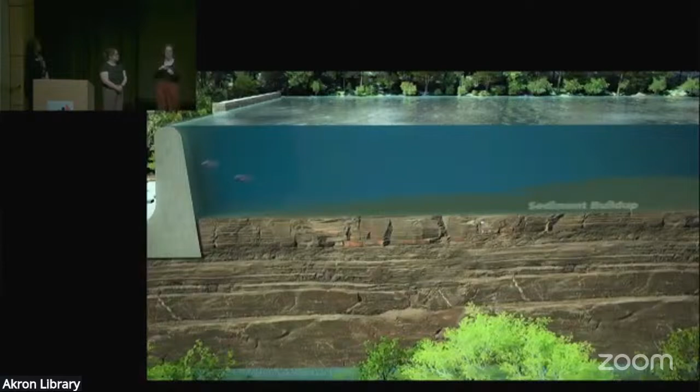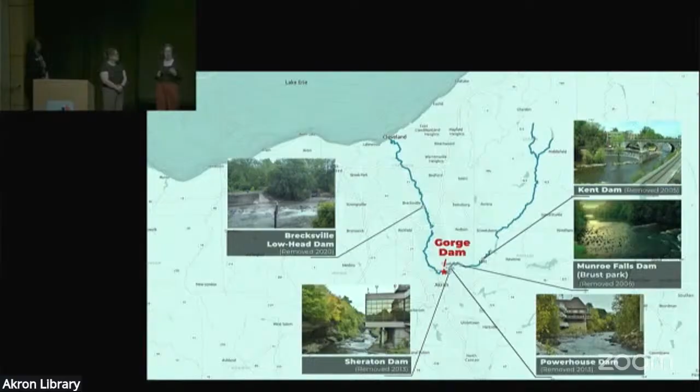Even though dams were built with good intentions, they cause a lot of problems for water quality. In addition to preventing fish from traveling freely, dams affect the dissolved oxygen, flow, and temperature of the river. They also reduce habitat, trap and concentrate sediments and toxins, and alter the food web of the dam pool. Five other dams have already been removed on the Cuyahoga, resulting in nearly 10 miles of restored river.

And what's good for the fish is also good for the people. These projects helped improve quality of life and drive economic development along the riverfronts in these communities over the past 10 years. That's why a large group of community partners have joined forces to free the falls at Gorge Metro Park.

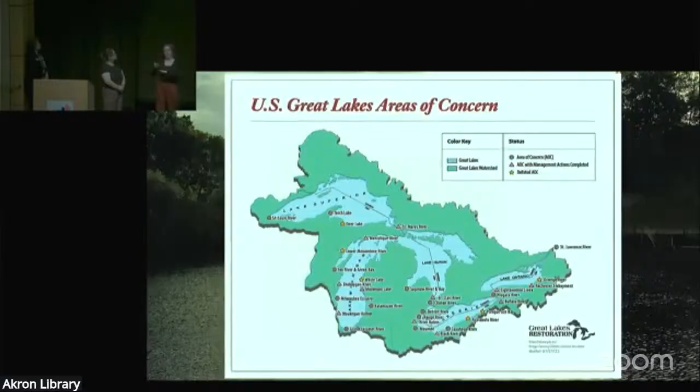US EPA intends to fund the majority of the project through the Great Lakes Restoration Initiative, and non-federal funds will also be required. A funding plan for sediment remediation, construction of the sediment disposal site, dam removal, and restoration of the dam pool is in progress.

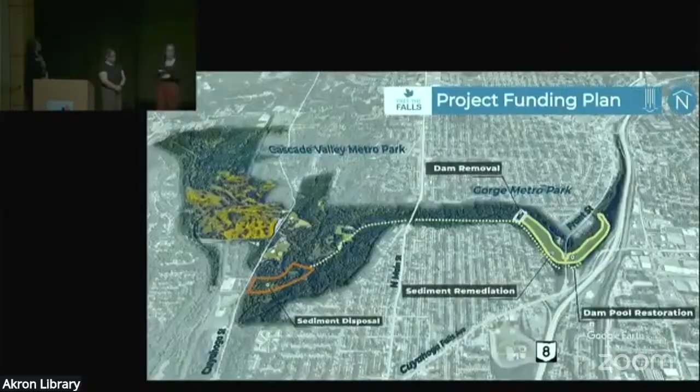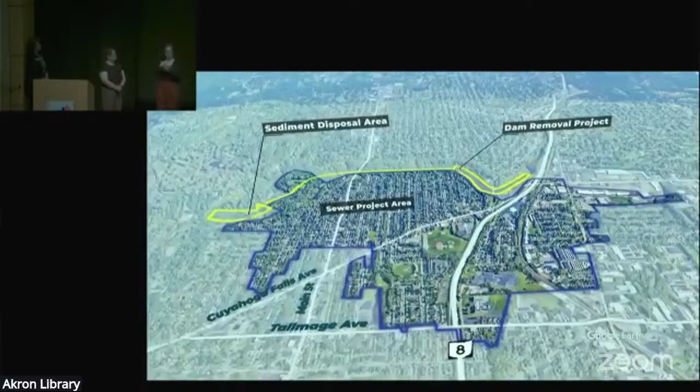Meanwhile, the City of Akron's ongoing sewer system upgrade requires construction work in the same area. While both projects are being carefully planned and coordinated to minimize disruptions to the public, there will be park and trail closures over the next several years. Although the result will be worth it, taking down a dam this big isn't easy.

So how will we do it? First, nearly 1 million cubic yards of sediment must be removed from behind the dam.

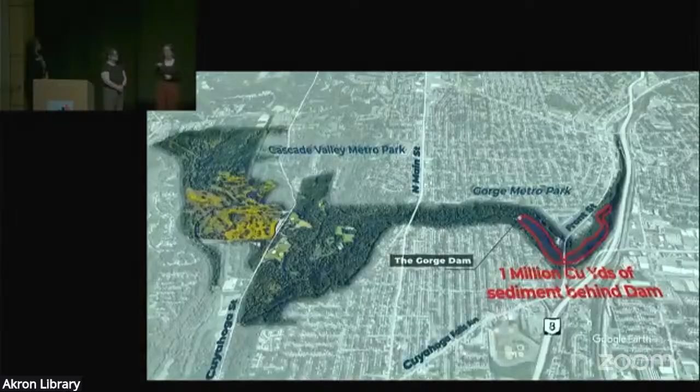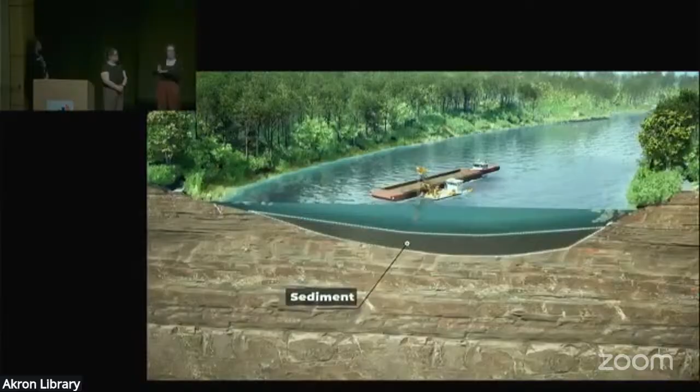The sediment has been collecting for 100 years and contains pollutants consistent with the area's industrial past. A mechanical dredge system consisting of a clamshell bucket, crane, and scow barge will troll the reservoir, slowly removing sediment scoop by scoop. This work will likely be completed over 2 construction seasons.

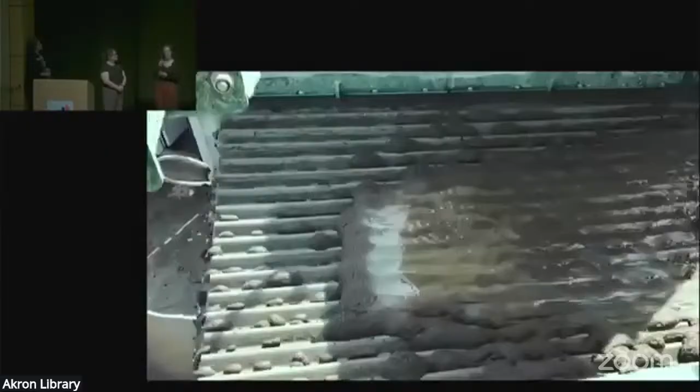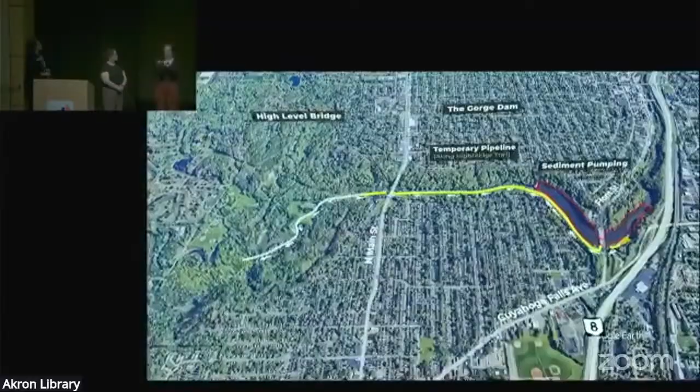Each full scow barge will then be unloaded at a staging area where it will be screened to remove any large debris. The still wet sediment will then be pumped through a temporary pipeline under the Front Street Bridge and then alongside Highbridge Trail. It will continue under the high-level bridge at North Main Street to the Chuckery area of Cascade Valley Metro Park, about 2 miles from the dam.

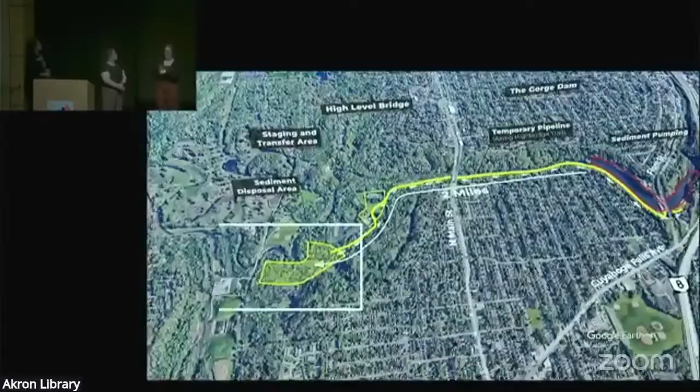The Chuckery area was historically a dumping site and will be utilized as the permanent disposal area for the contaminated sediment. To make room to store the sediment and concrete mixture, trees must be removed from a portion of the Chuckery area. The sediment is mixed with concrete in the pipeline to form a more solid material that can be contoured before it is fully stabilized.

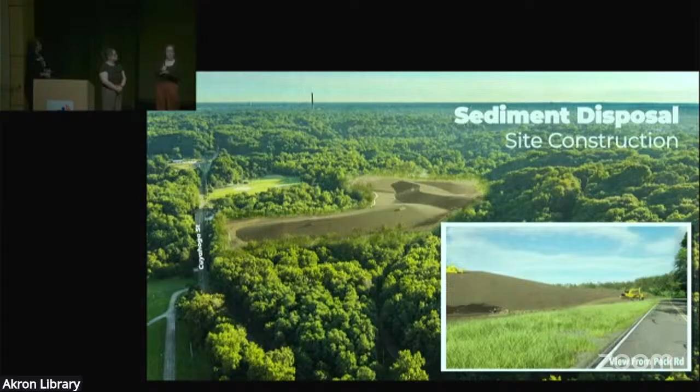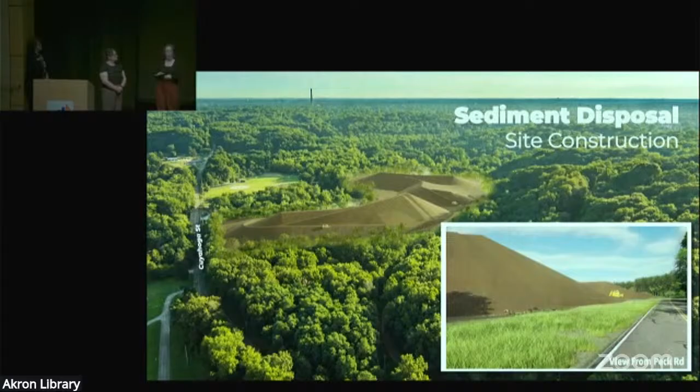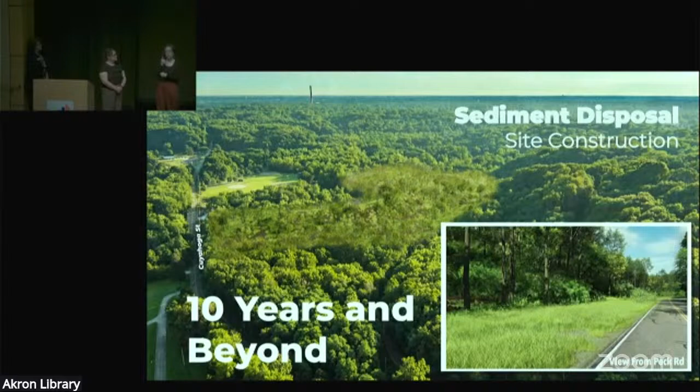This is an innovative and safe approach that has been used at sites across the country. The disposal area is designed to ensure permanent stabilization of the sediment mounds, minimize impacts to buried utilities, and appropriately manage stormwater. After final grading is complete, the sediment mounds will be capped with soil and the area will be planted with a native mix of trees and vegetation, and contoured to look as natural as possible. Within about 10 years, the final conditions will result in a biodiverse habitat that will complement the natural beauty of Cascade Valley Metro Park.

Next, the dam itself will be removed. The water level of the reservoir will slowly drop as the dam is dismantled. The dam will be deconstructed using a barge-mounted excavator.

To lessen the impacts to the area and to reduce costs, it may be possible to remove only the center spillway and exposed piping of the dam. If left intact, the remaining sections of the dam could then serve as a cultural resource and potentially be repurposed as a river overlook for park visitors.

The final step of this project will be to restore the river corridor to its natural state, with a rocky channel and vegetation that will promote a healthy river ecosystem.

Restoring the original grandeur of the gorge is our region's path to a vibrant future for the health of the river, its watershed, and its people. That future will bring clean water, natural beauty, recreational opportunities, educational experiences, and economic development.

This project has national significance and is supported by more than 50 agencies, businesses, and civic organizations, as well as the public. Dam removal is critical to restoring the Cuyahoga River and completing a recovery decades in the making. From our industrial roots flows a new future, one that carries Summit County forward while honoring our rich history. The result will be a healthy, free-flowing Cuyahoga River for all to enjoy.

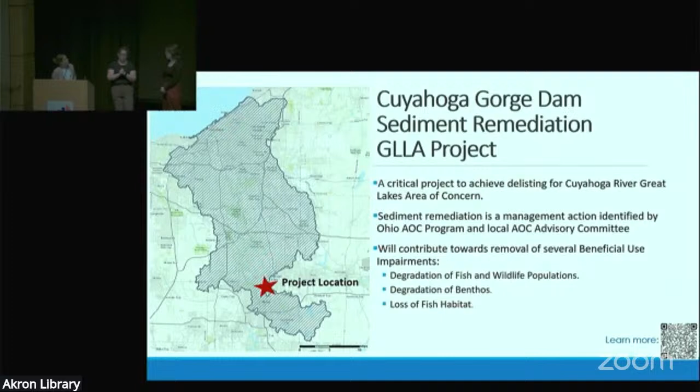I want to highlight that the levels of contaminants within the material are low-level, but they still do have health implications and are toxic to fish and wildlife, and therefore humans as well, so they need to be handled and placed properly.

But they're not hazardous material. If it were hazardous material, it would be a longer process, there are different programs, and it could end up costing more and taking more time. So it's really great that we're not dealing with hazardous material.

The dam pool itself goes up 1.5 miles upstream of the dam. This is the area that's going to be dredged, where the sediment is going to be removed. The sediment thickness throughout this dam pool varies anywhere between 1 to 34 feet. So it's not the water depth, it's the actual amount of sediment within the area that needs to be removed. That ends up being a lot of sediment, up to approximately 865,000 cubic yards.

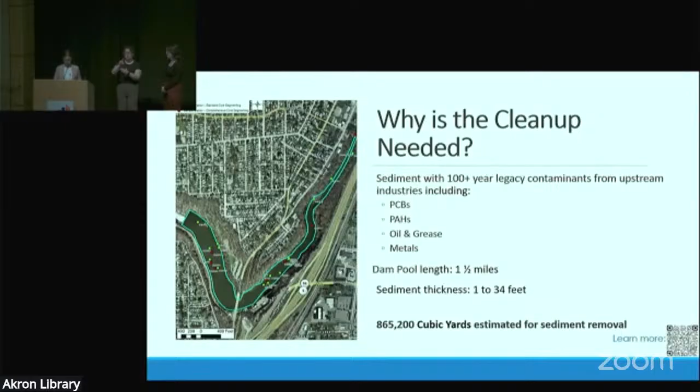That much sediment comes with a price tag. The Great Lakes Legacy Act Remedial Action Project costs just greater than $130 million. This effort, this project, is under a Great Lakes Legacy Act project, and in order for it to be a Great Lakes Legacy Act project, it has to be within an area of concern. That's one of the pre-qualifications, or criteria, for it.

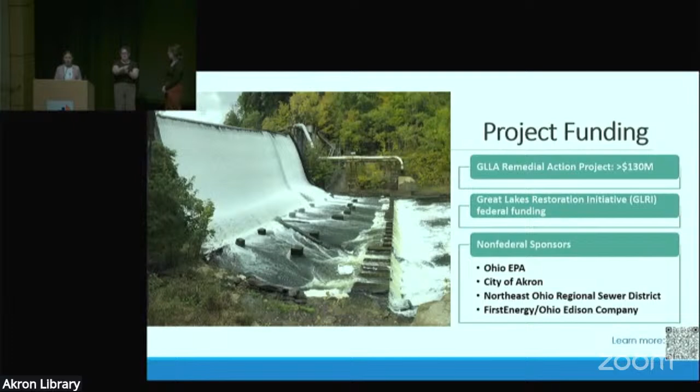With that, every Great Lakes Legacy Act project has a project agreement. This is with the United States Environmental Protection Agency's Great Lakes National Program Office, as well as non-federal sponsors. The funding from the federal portion of the project comes from the Great Lakes Restoration Initiative, and then the partners listed there—the Ohio EPA, City of Akron, Northeast Ohio Regional Sewer District, and FirstEnergy/Ohio Edison Company—are all non-federal sponsors to this project. They have signed the project agreement and are committed to either providing cash or technical support or in-kind contributions.

So I just want to highlight here project partnerships and what this project is. What's great about the Great Lakes Legacy Act program is that it is a partnership program, or non-regulatory—we're working with the partners to get these projects done. I had already mentioned the project agreement is between EPA and the non-federal sponsors, but there are several other project partners also listed there, and they have provided support, whether it be cash contributions or technical contributions for the project itself. So definitely want to mention there's support from the local partners to make sure this project can move forward and get done.

And also with any area of concern, there's a lot of federal partnering agencies that we work closely with, and the United States Army Corps of Engineers will be working to support the construction part of the project.

I'm not going to spend too much time on project timeline because when I introduce the next speaker, he's going to spend more time going through the details, but I did want to provide a brief overview, a background of where we've been. I had mentioned before, the Ohio EPA selected the dam removal as a project to address the beneficial use impairments within the area of concern. There was sampling completed in 2009 and 2011. A feasibility study related to the dam removal occurred in 2015.

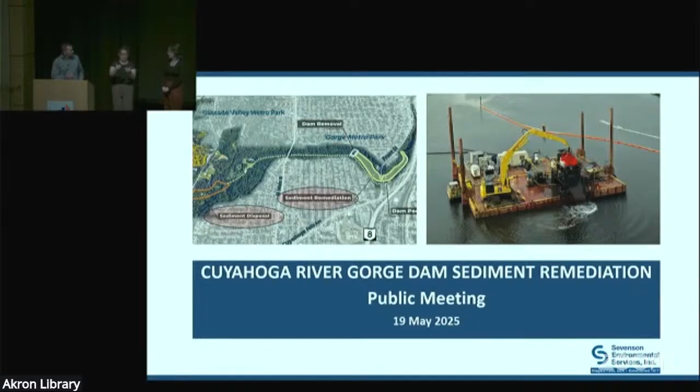A little bit about Sevenson: we are a more than 100-year-old company from Niagara Falls, New York. We are a family-owned business, owned and operated. It's the fourth generation now leading the company. We started as a building contractor in 1917.

One of our cool projects that we like to point out, in 1969, we stopped the flow of the falls. It's about 10 minutes from our headquarters, so it was a geological study that the Army Corps of Engineers actually did. There's another falls to the right of that one where we directed the flow, and they studied the rocks there that were building up at the bottom.

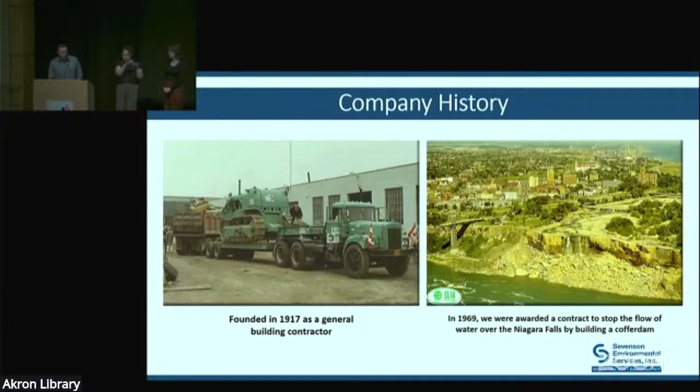About 10 years after that, and again pretty close to our headquarters, Sevenson performed work at the first Superfund site. That was called Love Canal. I'm sure some of you have heard of it. That created the Superfund program, which kind of sounds like its name - it was a big fund to clean up contaminated sites around the country. We performed the work at the first one. It was an old chemical dumping site where they were dumping chemicals near homes and by a school, actually. The contaminants were leaching into the ground and into the water, so we were called in to clean that up and cap the area eventually. So that formed the Superfund program.

That's another project we like to call out, and that kind of really got us into the environmental work. Since then we've been a national leader in environmental cleanup.

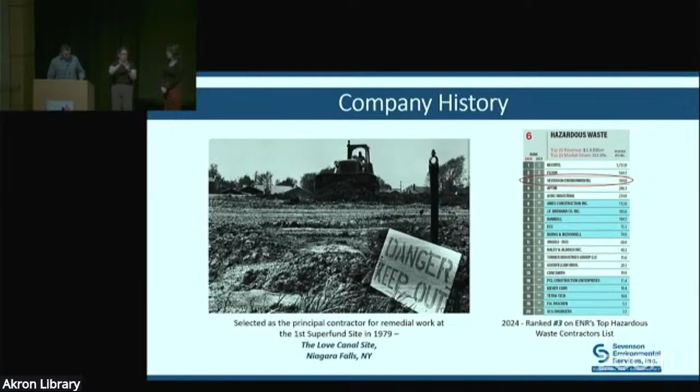A little bit about us, a couple more facts here: we completed over 1,500 remediation projects, 151 Superfund sites. Our revenue is about 60% private, 40% public. This is a publicly funded project - EPA, Army Corps, those kind of entities that we work for, along with private revenue.

We've got about 600 employees. That varies throughout the year as construction season in the summer, and a lot of them are union employees. We have a lot of union agreements around the country, so they're the ones operating the equipment, moving the dirt, shoveling, stuff like that. We did want to point out we are using union employees on this project, employing local union workers, whether they're running the equipment or on the ground as laborers. We'll probably have 20 to 30, maybe even a little more, local union help. So we're excited to get them involved in the project as well.

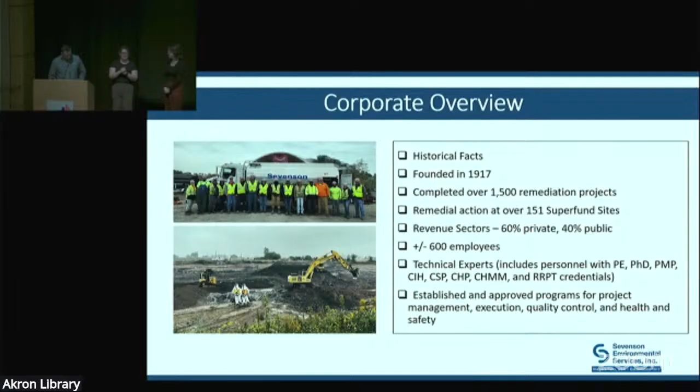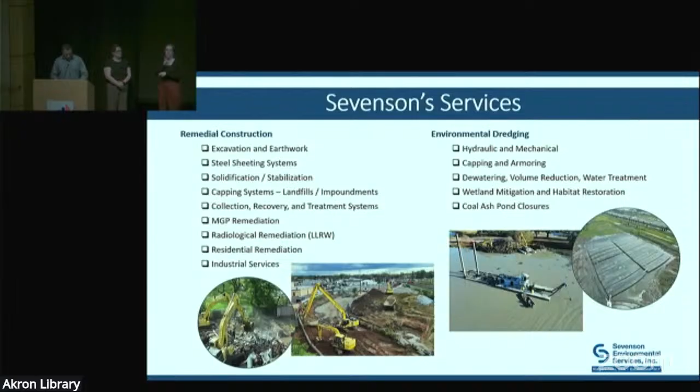A little bit about our services - it's kind of split there on the left and the right. Remedial construction is kind of like uplands work, dirt work, moving dirt, excavation, residential remediation, stuff like that. On the right-hand side is environmental dredging. Really the last 20 years or so, a lot of the contaminant cleanup has shifted to marine work, so that's a big part of our business now, but we really grew with the land work and then transitioned into the marine dredging, which, as you all know by now, this is a dredging project. So those are some of our services.

Equipment, we own a ton of it. It's 3 to 4 hours away in Niagara Falls, so we're going to bring in a lot of it to perform this work. If things change in the field, and they will, we have a ton of resources close by, so we'll be able to mobilize equipment and get it here quickly to adapt to any challenges that arise. We also have the ability to custom make any equipment or material we need, and we're in the process of doing that for this complex project.

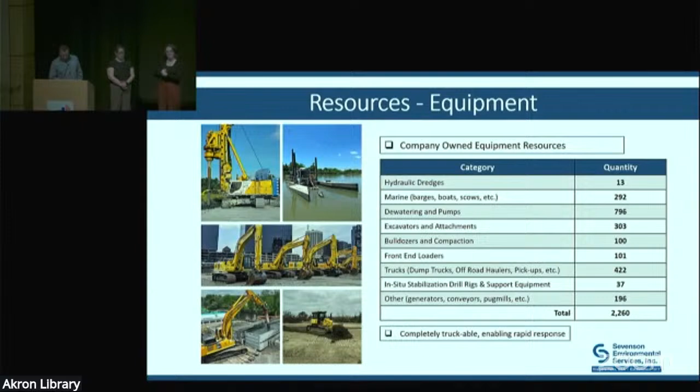Lastly on Sevenson is our safety program. This is the number one concern on all Sevenson projects: the health and safety of our employees, and also the community and the environment. So we take our safety very seriously.

We have certain health and safety plans that need to be formalized and submitted to the EPA, and they review it. So we review it with our field personnel and management - it's something we do on a daily basis. We have a morning safety meeting at 7 a.m. every morning. Again, something we take pride in, and we'll make sure this is a good, safe project as well.

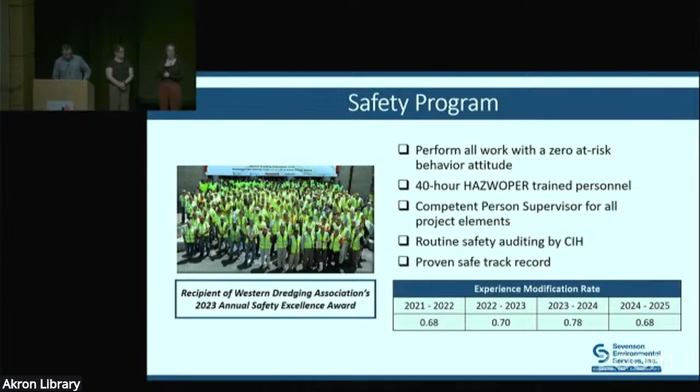Okay, so now what everyone's here for, a little bit about the work. I'm going to run through site prep, mobilization, and then into the dredging, processing, pumping, and restoration, and then at the end we'll touch on schedule.

With anything in construction, we like to remain flexible and just say that things will change, and we'll do our best to keep everyone informed. I know it's an important project, but construction has a way of changing daily, if not hourly. So I just like to state that going into it.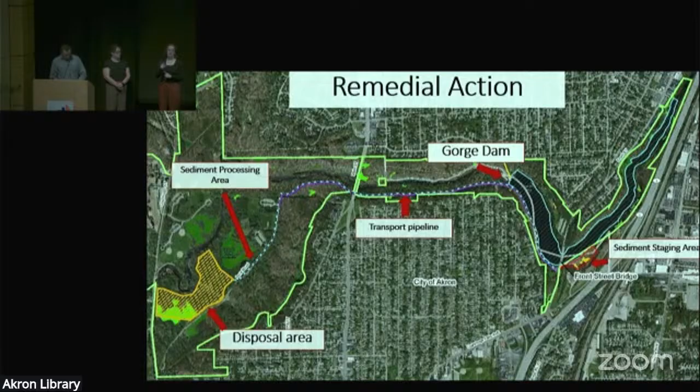Okay, so this is one of our staging areas up by the dredging. It's just off of Front Street at the former Ohio Edison property. You can see we have an access road to get in - we already brought in some stone today, so this is ongoing. We'll set up our staging area here, with a little trailer for some of our personnel, sanitation facilities, and a generator for power.

And then over here is the debris offloading area. We're expecting a bunch of debris as we dredge, and that gets separated out from the actual sediment. So it gets pushed over here, unloaded with an excavator, and then this is the debris staging area before it gets sent off site.

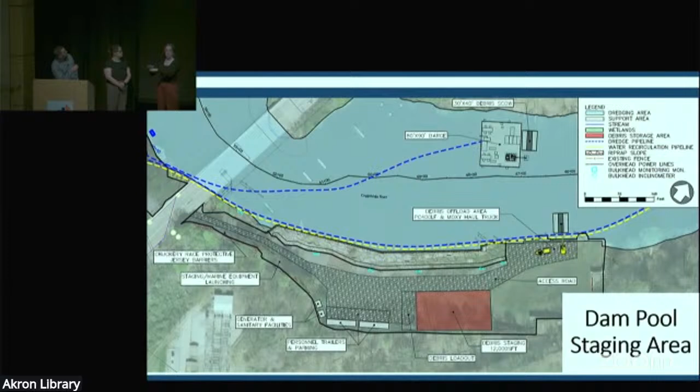We will have to access the other side of Front Street because the bridge only has about 12 feet of clearance, and our equipment would not fit under there. So we have to improve this area a little bit by building a ramp down to the water. If anyone's been over there, it's a pretty steep drop down to the dam pool, so we'll improve that a little bit to make sure we can get our equipment down there, but there shouldn't be a whole lot of other activity over at this smaller parking area.

We will put up a fence to secure the area, but some of the project partners who may need emergency access, whether it's FirstEnergy or Summit Metro, we'll be able to provide that. We've been working with them to make sure they have access to that.

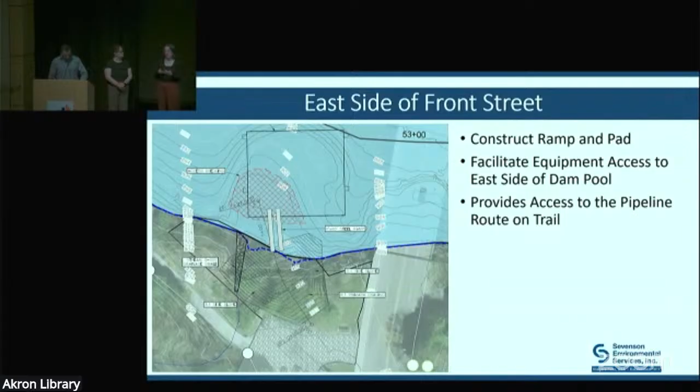Okay, and then it gets pumped down through High Bridge Trail down to our other staging area along Peck Road. This is obviously close to the tunnel project down there, so it'll be a busy area, but again, we'll have some trailers up here with some parking.

The darker blue areas are just equipment and material staging. This light blue area is a little water tank, holding tank to help with dredging. As you dredge, you're going to generate a little bit of water, so that's a little holding tank there to help us. And then there's a stone road we're going to build to help get equipment and personnel in between the areas.

I'm going to touch on this area a little later. This is where we're going to introduce the Portland cement to help stabilize the material. And all of that comes out of here, which is where the dredge material gets initially pumped to. If you can see this dotted line here, that is the dredge pipeline. So that comes down through the trail and then into this area where it gets staged until it gets processed with cement. Last thing to point out on this one, there is either a type 3 or category 3 wetland in this area, and that gets protected throughout the project, so we're staying off of that intentionally.

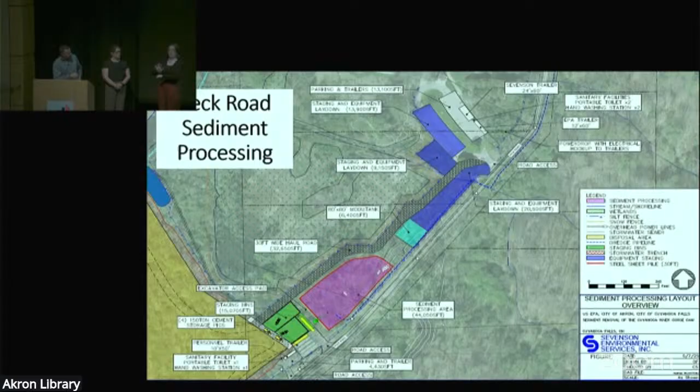There is a lot of mob and a lot of setup. We're probably anticipating 3 to 4 to 5 months. So like I said, there's a couple different areas and a lot of setup. So that's what we're expecting.

So a process flow diagram, and again, I'll get into each of these on their own in a couple slides here, but a dredge crew up here, we talked about how it flows down to the sediment processing area, and then this offshoot here is just the debris that we also talked about, where it gets separated and staged at the Front Street staging area.

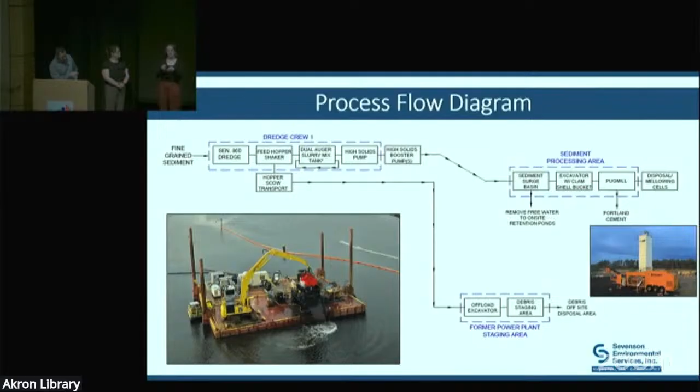Okay, a little bit about the dredging. Just wanted to show some pre-dredge surveys and then what we're anticipating for post-dredge based on the design of the sediment removal. So some of you may be familiar with this, but there are some deeper areas closer to the dam, and as you work your way toward Front Street, they're about 12 to 25 feet, I think, in just water depth. And then as you get on the other side, the east side of Front Street Bridge, it gets very shallow. So just wanted to point that out.

We will have to dredge downstream to upstream. Typically you like to dredge the other way, but our equipment drafts about 4 to 5 feet, so there's just no way to get up there without dredging first. So in that area, we're going to be working downstream to upstream.

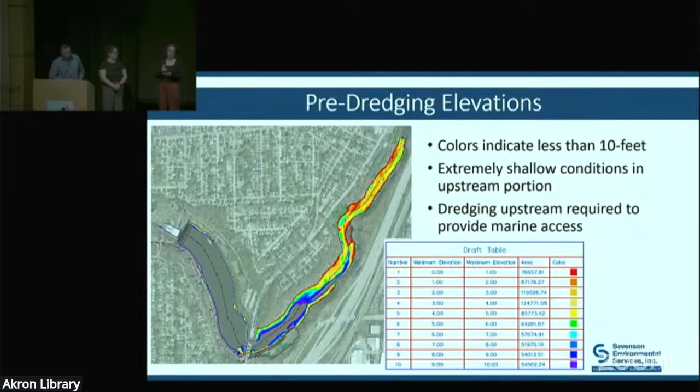And here's how we're expecting it to look after the dredging, and as Courtney mentioned, taking out upwards of 30 feet of sediment in some areas. You can see it gets very deep down by the dam, obviously before it gets removed. Some areas 50 feet, and then it gets a little shallower, but still, 5 to 20-ish feet throughout the entire area.

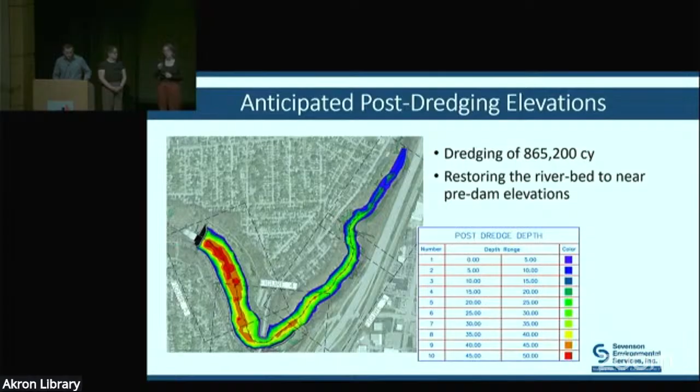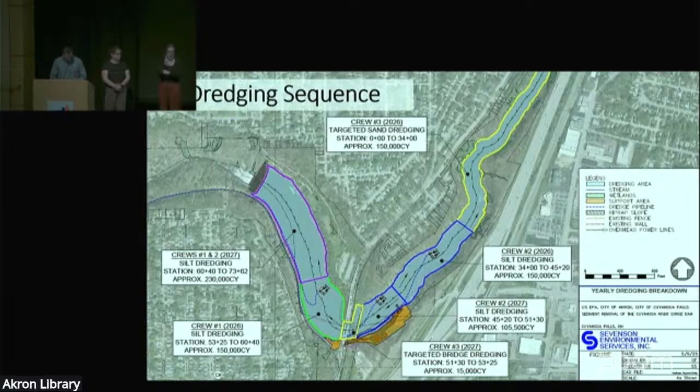Okay, the next couple slides here focus on the actual dredging. I'm going to walk through it as we would do it.

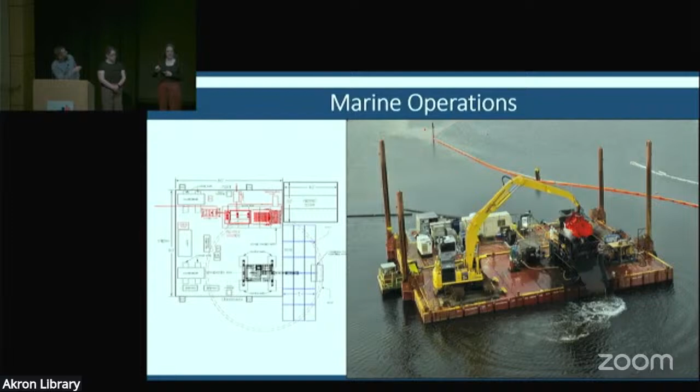So it gets mixed in that slurry tank, and on the next slide here you can see it a little better. He's dredging here, hoists it into this slurry tank. It gets mixed, and then this pipeline behind it pumps it to the Peck Road site with pumps. There's a couple pumps along Highbridge Trail as well.

So it's a little different from that video you saw. In that video, it was pushed to the bulkhead and then pumped from there. We're just doing it right at each dredge platform to make it a little bit easier.

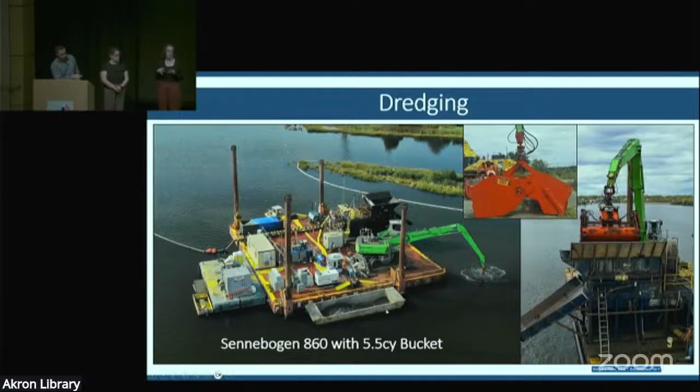So this slurry system here has a screen on top, so it'll screen out the debris, and this is kind of what a little scow, we call it, will look like, where the debris will funnel off to, and then that'll get separated out because it can't get pumped to the disposal site.

There's offsets to protect it as well based on the design, but we should be able to get about probably 85 to 95% of all that sediment under the bridge with this smaller but still bigger piece of equipment.

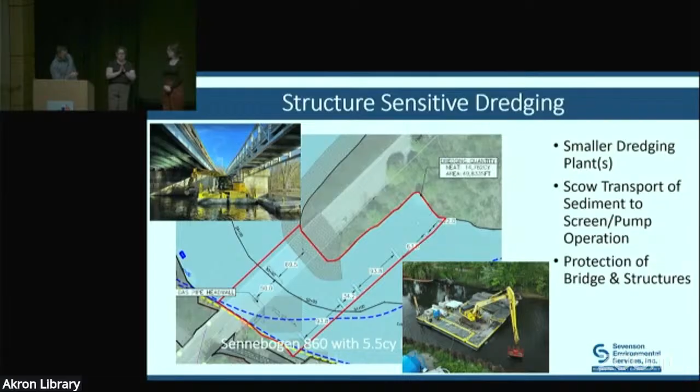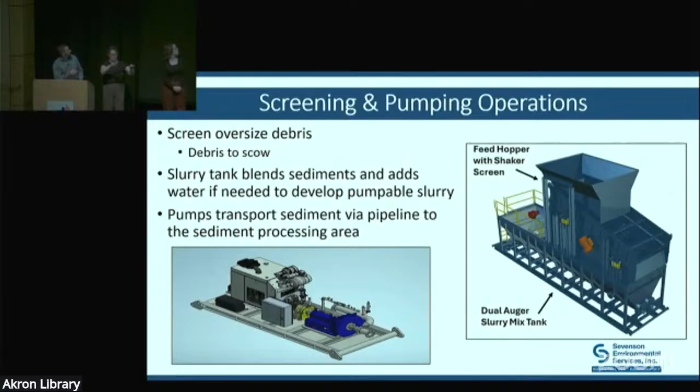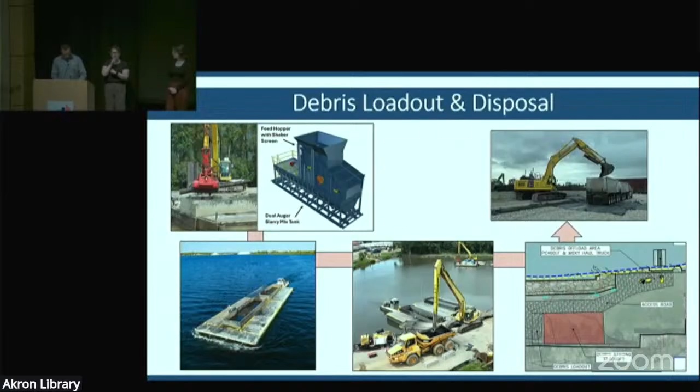So there's certain permits and certified truckers and certified landfills that you need all the documentation and paperwork for, and we'll be sure to do that before we start sending debris off site. And that's the only material that's leaving the site, so we're not expecting a ton of it, but probably 1,000 to 5,000 tons depending on what's in the dam pool.

There's chuckery that we need to protect. First Energy needs access, and we have to avoid their power poles, their overhead wires. So there's a lot of factors, and then we have to get to our pumps that are on the trail to fuel them. We need to inspect the pipeline.

All that goes into installing this pipeline. So we're expecting to start putting this in maybe mid-June, and it'll probably take just a month to put the pipeline in and make sure it's secure and ready to go for dredging.

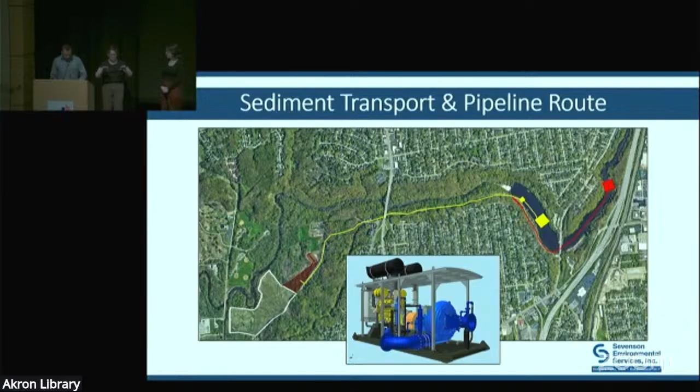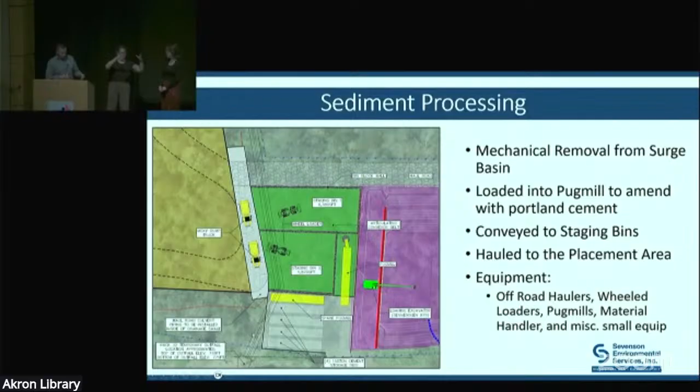So it gets loaded into there, and in the next slide or two we'll go into a little more detail on that. Once it's amended with the Portland, it will be conveyed to these staging bins where wheel loaders with big buckets will grab the sediment, load it into a couple trucks, and haul it to the placement area. So that's the process on how it gets out of the big storage container and into the placement area with those mountains that you saw in the video.

So here is a close-up of that pug mill that I was describing. This vertical silo actually stores the Portland. Out of those storage pigs, it gets moved to here where it feeds out, gravity feeds out, and mixes with the sediment right in here. This is where the sediment will get dropped in, and then it gets mixed directly with the Portland.

It's a pretty meticulous operation. Everything's automated, so we know exactly how much sediment's going through there, exactly how much Portland's being introduced, and it's all measured by weight. Right now we're targeting 10% Portland by weight. That will definitely change as we move along - hopefully it'll go down, since less Portland is always better for us. But it will definitely go up in some instances too, depending on the material. As we fine-tune our system, that'll change, but it's based on previous studies, and we're going to do a study of our own to dial in that dosage a little more. To start, we're going with 10% Portland cement.

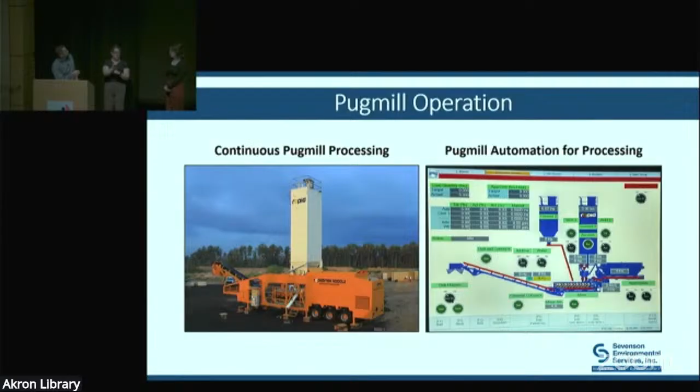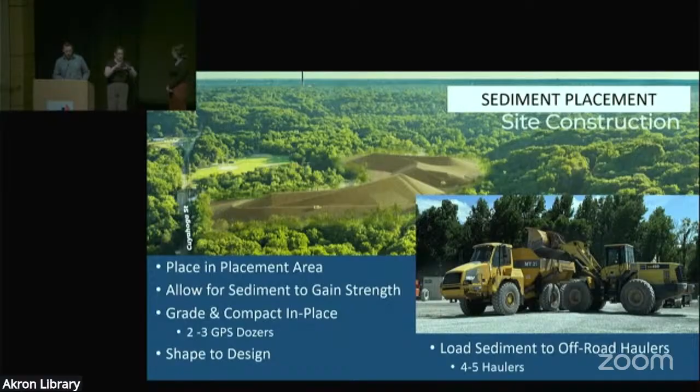Okay, a couple more here. We saw this drawing of how the landfills may look. Again, this is just a rendering - it'll look a little different, but a lot of planning and design goes into this to be able to shape it, make sure the drainage stays positive and flows, and make sure erosion isn't an issue. So there's some erosion control matting, some stone, all that kind of stuff goes into this to make sure it's a good product in the end, which leads to restoration.

So the entire placement cell will get hydroseeded. This is kind of what hydroseeding looks like, and then it'll start growing on top of that 1.5 foot vegetative cover. So dredge sediment is shaped, and on top of that is 18 inches of native fill that's being brought in to cap the dredge sediment, and that'll help facilitate the growth of the hydroseeding.

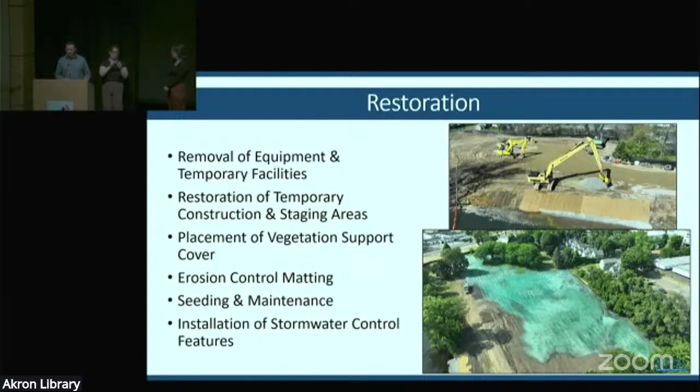We touched on the erosion control matting and some of the maintenance and monitoring that goes with that as well. Even after we demobilize and remove our equipment, it'll be monitored for growth, and if it needs to be touched up or anything, that's our responsibility as well.

Okay, so the project schedule - again, I think I've said it a couple times, but this is subject to change based on construction and things that change in the field.

We are targeting to start dredging this fall, in August or September of this year. There's a little pilot study that needs to be done to make sure all the equipment and processes are working. Then the three different dredge platforms and equipment I showed in that rendering are scheduled to begin in April of next year. At that point we'll be full scale, with all three operations running, and dredging will go all through next year and all through 2027.

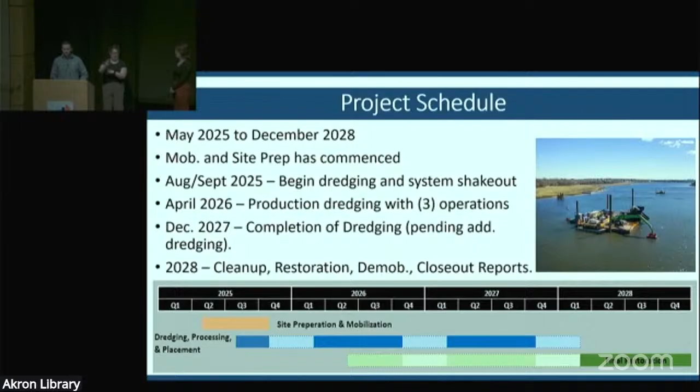So target right now is end of 2027, pending additional dredging. That could be some sediment that flows in from upstream, or maybe a bit more at the bottom than we were expecting. There's always maybe a little bit more, so that may push into 2028. But the current schedule is to try to finish dredging in December of 2027, with restoration, closeout, and demobilization by the end of 2028.

All right, I've got two more topics here: monitoring and quality control. There's a ton of monitoring that'll be going on at this project along with quality control. One of the biggest is monitoring of the dam itself. We're not expecting anything to happen to the dam while we're working, but a lot of sediment is being removed from behind it. So there's surveys, seepage monitoring, water monitoring, and water elevation monitoring. All of that is being done by a subcontractor we're hiring who is very good at that monitoring, and all of it will be set up before we start dredging close to the dam.

Another quality control device we like to mention is the GPS on our equipment. Dredging or digging underwater is pretty difficult—you can't really see anything. So all of our dredge equipment is GPS enabled. The operators have a little screen in their cab where they can look while digging, and they know exactly where they are, how deep they need to go, and what the limits of the project are. They see that in real time, and their screen updates every time they remove a bit of sediment, showing that it's gone. Then we have a surveyor who can survey the bottom a little more accurately than the GPS.

Another thing we're monitoring—this little buoy you can see is a turbidity monitor. Turbidity is suspended sediment in the water column, for anyone who doesn't know. We monitor for that and try to keep it as localized to the dredging as possible. So we'll monitor that and put in any turbidity curtain or other controls as needed as the monitoring goes on.

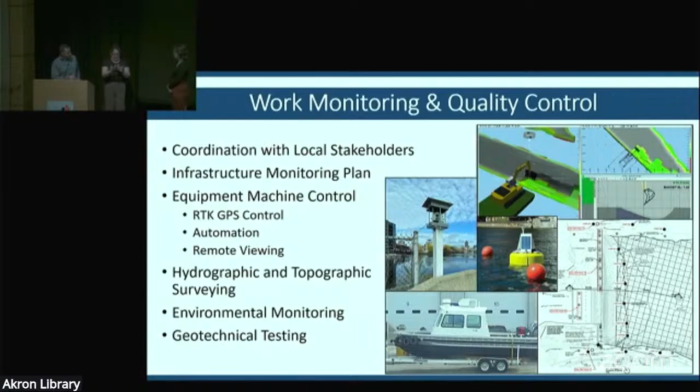Okay, this is the last slide. Project work hours right now, during setup and mobilization, are 5 days a week, 10 to 12-hour days. But as we start dredging, we'll go to 6 days a week, 12-hour days. Everything's more difficult on the water—it takes longer, so we want as much time as possible to complete the project. Sundays are reserved for maintenance—there won't be any impacts on Sundays, just things like oil changes for the equipment, since it's running so many hours.

As for public impact, honestly we're not expecting a whole lot, besides some of the trails being closed. We monitor the air at the work areas for public safety and our own workers. This is a water truck—it'll mainly be used down by Peck Road, where we're moving a lot of dirt, to make sure there's no dust. Other environmental controls like erosion control and silt fence will be installed. All of it needs permits through local agencies, so that's all tracked before we even start. We're not expecting any night work right now, and there shouldn't be any odors.

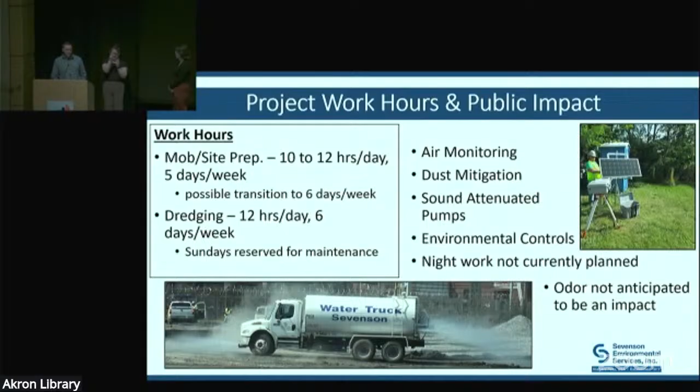One thing I want to mention that's not up there: some of the trails are closed, so please respect those closures. I know it's an impact now, but it'll be worth it down the line. We have a ton of equipment and a lot of our guys moving around, so we just hate for anything to happen to anyone in the community. There'll be signs everywhere—please respect those, and if you have any questions, there's information on the signs. I'll be here for the next 3 years, so you can get a hold of me. We know this project means a lot to all of you in the surrounding community, so if it's important to you, it's important to us, and we thank you for your time tonight.

I think the next one is me.

All right, so I'm going to talk about park closures, so it's a slight bit less complicated. That was great information. I'm going to lighten it up just a little bit because I think we all need a 2-minute break from all the interesting information. Not to say park closures are not interesting.

So on this slide we're going to talk about closures. During the sediment removal project, we will be managing a couple of different park closures, which I'm going to explain. Why closures? You just heard all about it - it has all to do with safety. Our primary concern, Sevenson's primary concern, is the safety of the folks that are working as well as the public.

So we're going to be doing that with protection of the construction zone with construction fencing along the riverbanks. And the contractors - that keeps our folks that are looking at what's going on safe on the riverbank. They need to stay back. So one of the imperative things we must do, as Sevenson requested and we intend to comply, is to do our level best to keep people from fishing in the dam pool and off the bank.

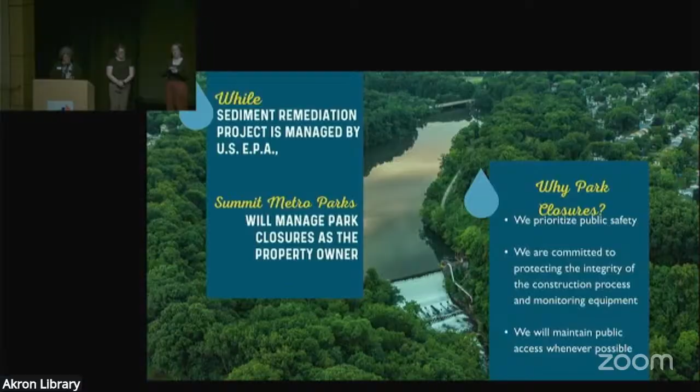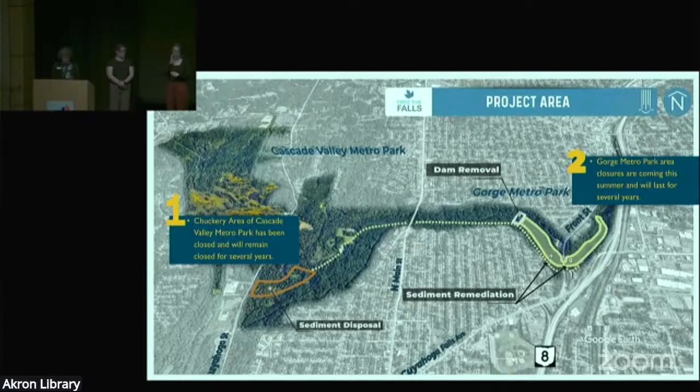So everybody can find the red - that's the trail portions that will be closed. Where you see the dashed dot lines, those are the trail portions that will be open. So the Highbridge Trail and parking lot will be the first thing that we're going to close, on June 2nd, as the contractor begins working his way into the sediment removal and laying the pipeline. As you already know, anybody that's been on the Highbridge Trail, it is right above the dam pool. So we will be totally closing that on both ends, just so you're aware.

The next closure will begin July 14th. We're going to close the Glens Trail entirely, and the Lower Gorge Trail to the observation deck. This is in preparation for the contractor's start of dredging in the river.

So the red portion on the map shows the Gorge Trail portions that will be closed. You'll be able to hike the Upper Gorge Trail, that's to the top there. That part goes to the west, which will be an out and back trail. So there will not be a loop once we get the sections we need closed.

It's really important that the public respect these closures, as we've already mentioned. Tell your friends. Safety of visitors is our top priority, and keeping away from the construction zones is the best way to maintain safety. Even if there doesn't appear to be construction or heavy equipment on any given day, there is sensitive monitoring equipment measuring, as Sevenson just explained, and we need to be careful not to disturb those along the shorelines. So that also adds to a main reason that we need to close portions.

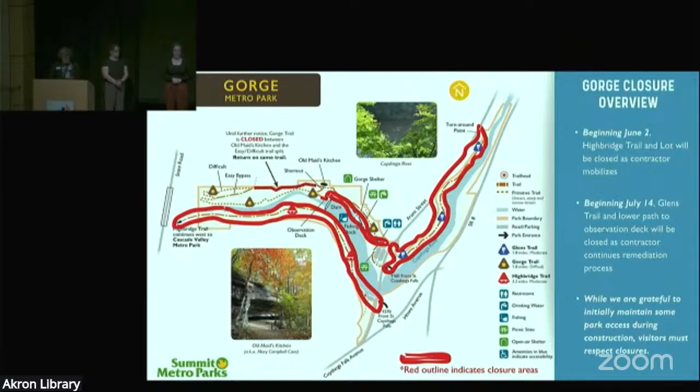All right, now I'd like to introduce Heather Ollinger, City of Akron Project Update.

Down arrow, advance. Thanks, Lisa. So I presented on Saturday without a PowerPoint at the Cuyahoga Falls Amphitheater, and I was totally lost. So I'm grateful to have a PowerPoint tonight.

I'm Heather Ollinger, the City of Akron's project manager for Gorge Dam removal, and GPD Group prepared this presentation for me, so thank you to my design team at GPD and AECOM.

So I'm going to be giving you an update on the City of Akron-led projects. We've actually completed 2 construction projects, so I'll show you some pictures of those. And then I'll be talking a little bit at a high level about where we're at in design of the dam removal. Just to preempt that conversation - we're at a 90% design stage right now. We're going to be slowing down a little bit because we want to be able to incorporate the data from the dredge operation.

Charlie said that they're getting real-time data from the dredge, and we want to make sure that data is being input into our plans, so we're giving our contractor the best actual picture of what they're going to be working on.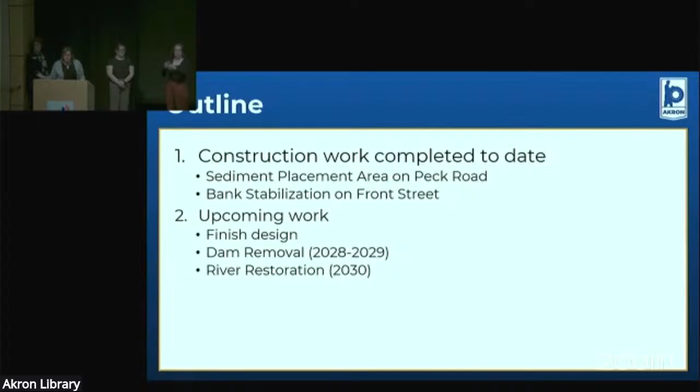Okay, so pretty picture time. This is the sediment placement area on Peck Road. The city of Akron got a grant to prepare this placement area. This was funded through Ohio EPA Water Resource Restoration Sponsor Program. It's a long name. It cost about $500,000.

The scope of the project was creating ditches around the site. We wanted to make sure that site is ready to receive the sediment when it comes later this year, and those stormwater ditches allow for proper drainage of the site. We also had some pretty soft soil there that had to be removed, and we stabilized the ground there as well.

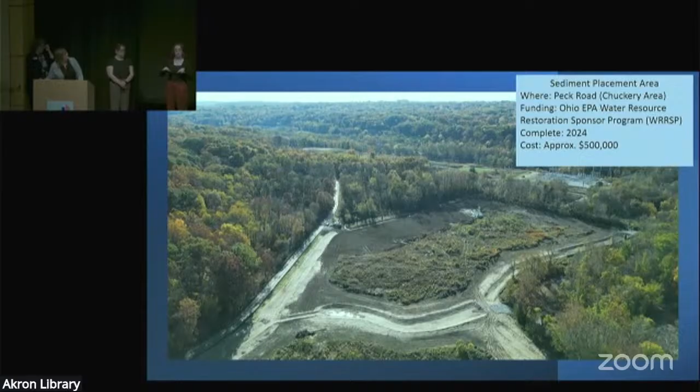And then at the other side of the site, at Front Street, we did a bank stabilization project of the former power plant site. You may have seen this if you've driven on Front Street recently. We removed the failing sheet pile wall, graded back the site, and added some stone to make that a safe laydown and staging area for the contractor to use. This project was funded through US EPA Great Lakes Restoration Initiative, cost about $1 million, and was just completed.

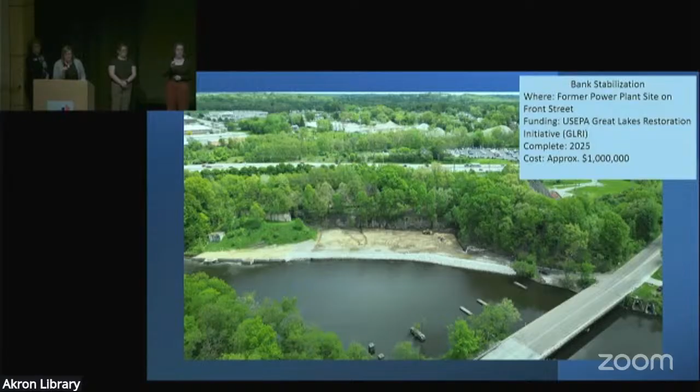Now getting into some highlights of where we're at with the dam removal design. We've been working on this for a few years now, and it's changed a little bit over time, but as Bill said with our project video and the observation deck, we will not be doing that because we need to access the dam from the north side. So we're going to be starting demolition of the dam by water on barge, and once we get to a certain level, we have to switch to land access, using the lower gorge trail for that land access and cutting down that north part of the dam as we go out onto the spillway.

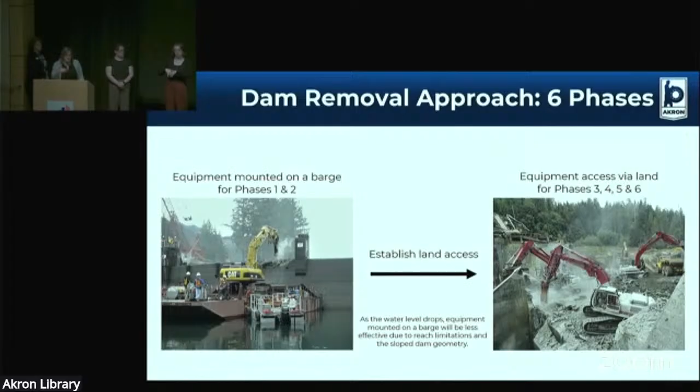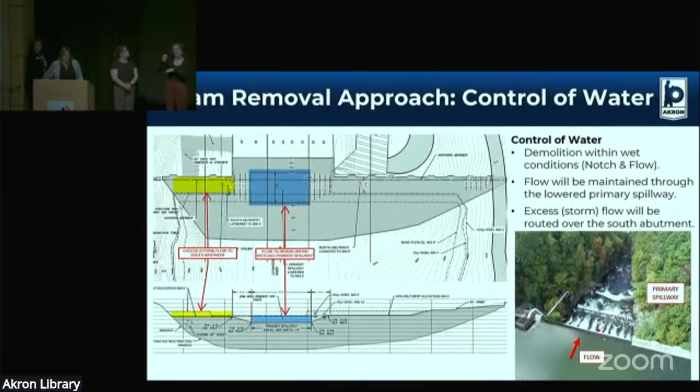One of the big aspects of the dam removal project is how do we control the water? We all know we've had very big storm events and the water level fluctuates a lot. We'll be controlling the water by notching the dam in the spillway portion—that's traditional dam removal methodology that's used. When we get large storm events, those will be spilling over the south side of the dam where the pipes and other concrete structures are.

And the falls—we know the dam is built on the top level of the falls, so we plan to remove the concrete structure of the dam all the way down to rock. We plan to expose the falls and all 4 sections of falls.

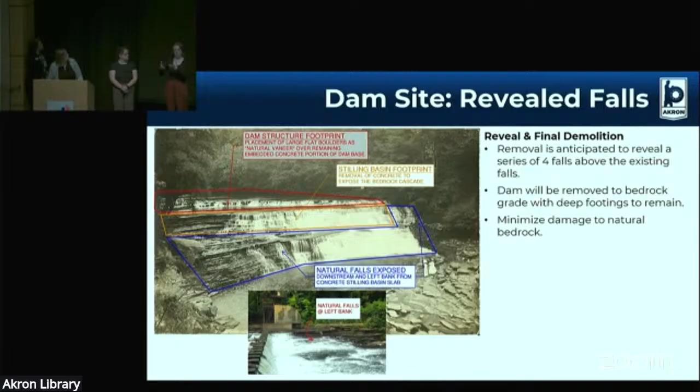This is just talking a little bit about river restoration. As I said, we're not sure what we're going to be left with, but we want to leave it looking like a natural condition. Obviously the dam's been there for a long time, and we're not sure what it's going to take to demolish the dam down to bedrock, so that may be a bit of an iterative or wait-and-see approach once we get down to that level, but we do want to leave it looking like a natural flowing falls.

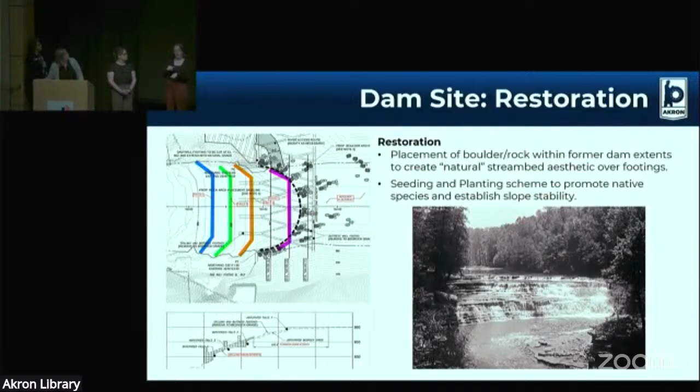And that's it. Thank you. Thank you, Heather.